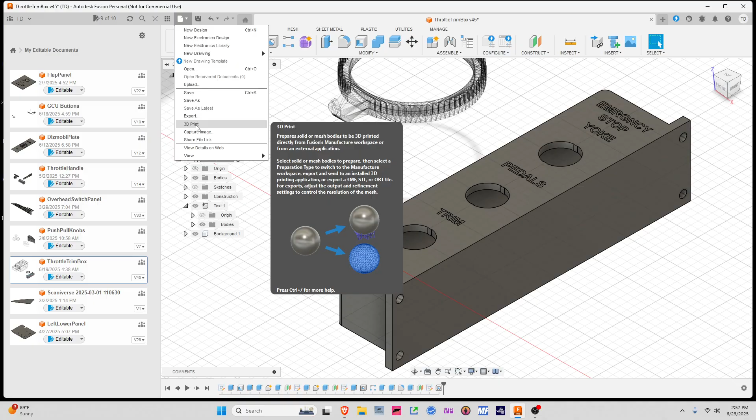The way you've made this text is through a sketch and then extruding these things, so it creates a bunch of bodies or multiple components. In the end it's the same thing or the same problem. So you've got this thing. Pay attention to trim right here. I'm going to do this all here so you can see the whole flow and see if it applies to the problem you're having. So we're going to 3D print this.

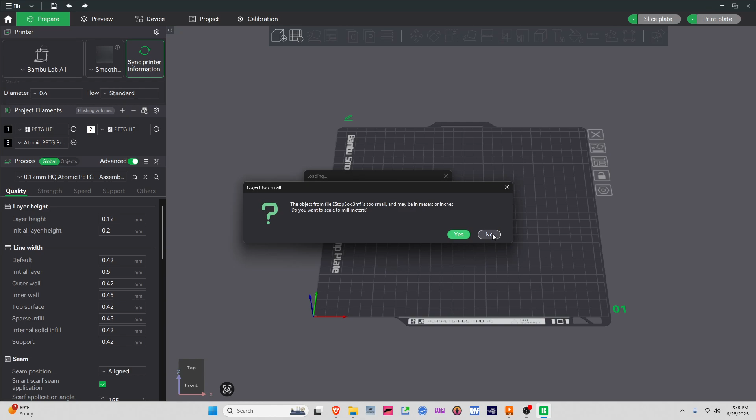Save it here. C:\SimStuff\Parts Building. Okay, we've done that. C:\SimStuff\Parts Building. It is this one. Every time you open it from scratch, it's going to say this. You say no. It's going to say this. And if you want all the parts to stay in the right place, say yes.

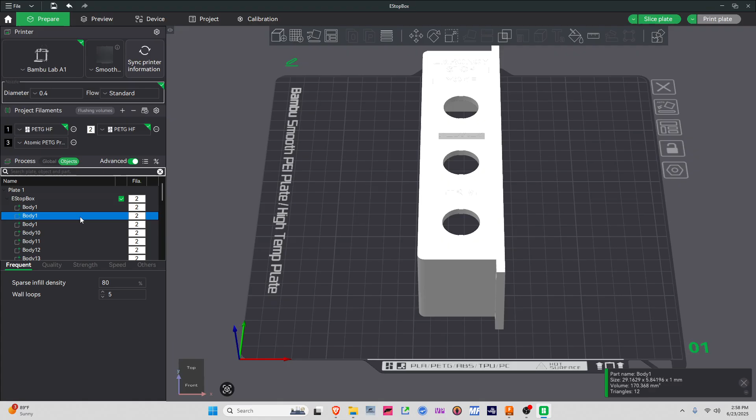Okay, now it's all black. I'm going to print this face down, but that's not necessary or relevant to this. So now we go into objects. The fastest way to do this is to select all of them, make them white, and then find the actual body, that's it, the frame, the case that I want to be black, and make it black.

Okay, so as you can see, all the letters are here. The word trim is intact, although it does this weird display thing. Now I'm going to slice it.

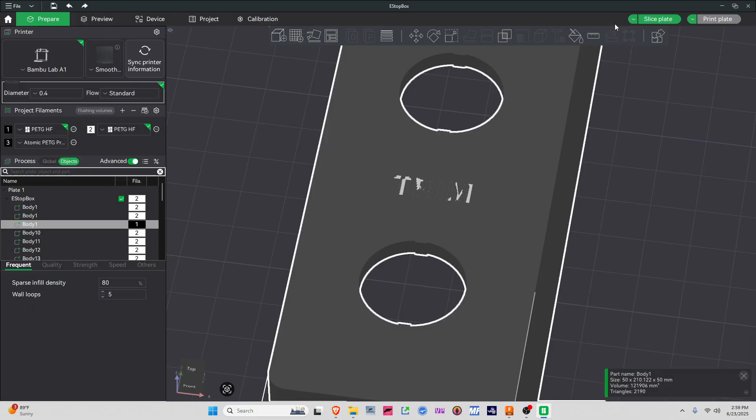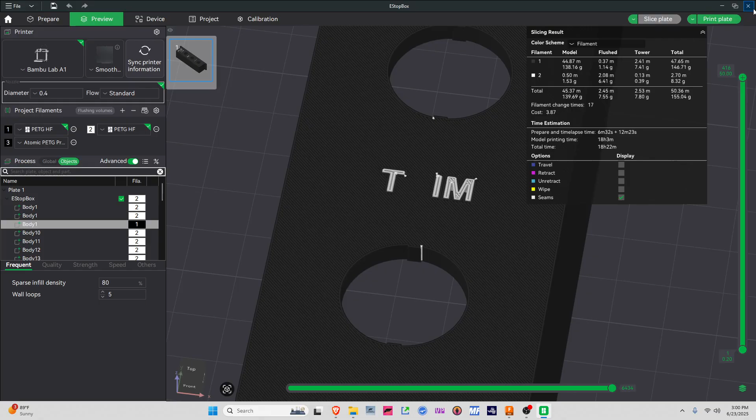And the R has disappeared. Now I can tell you there's a lot of internet responses that say all kinds of things, like this letter is too large, there's not enough space, the nozzle's too large. Try 0.2. As you can see, I'm doing this with a 0.4. I've tried 0.2, I've tried separating this text all the way across so there's huge gaps in between them, and still that R is never there after I slice it. I've tried this in Bambu Studio and in Orca Slicer with 100 different setups.

So now, just to make sure we're on the same page, I'm going to do this again and change nothing. So this is the flow again. Same place, C:\SimStuff\Parts Building.

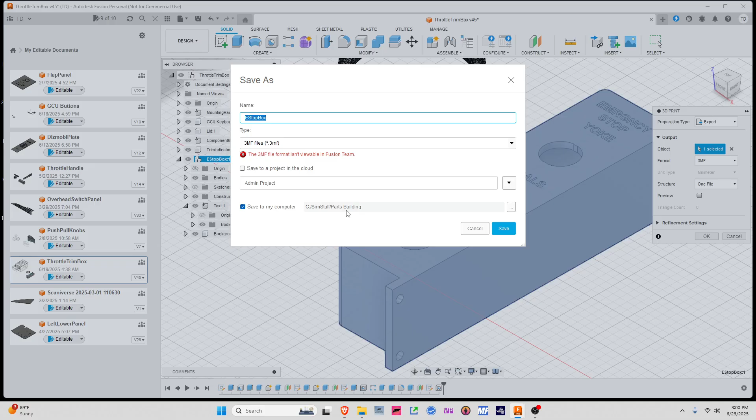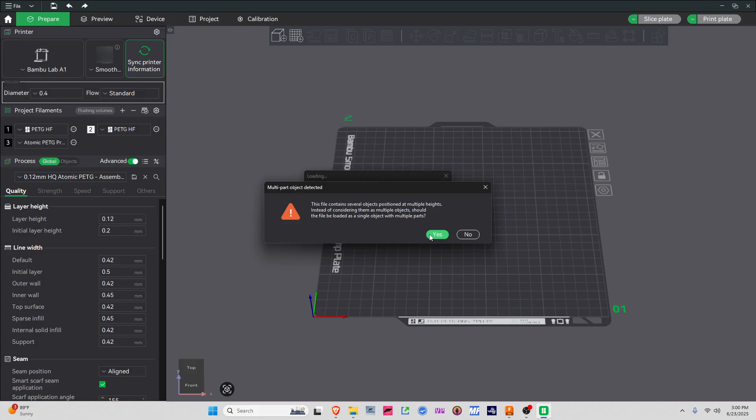I'm going to replace it. We'll go over here, we have a new updated time. So this is our new one. Again, we have to go through this because it's the first time we're opening it in Bambu Studio or in the slicer. We're going to do this bit again, make everything white, and then find the actual body or the frame and make that black.

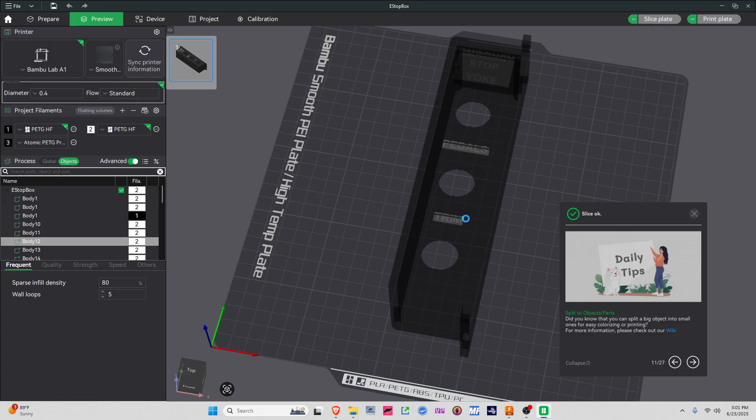Again, we're where we saw we were, the word trim is there, slice it, and again the R is completely missing.

So here is how you fix it. This created multiple bodies. The R is actually the top one, and that's the one that's getting skipped.

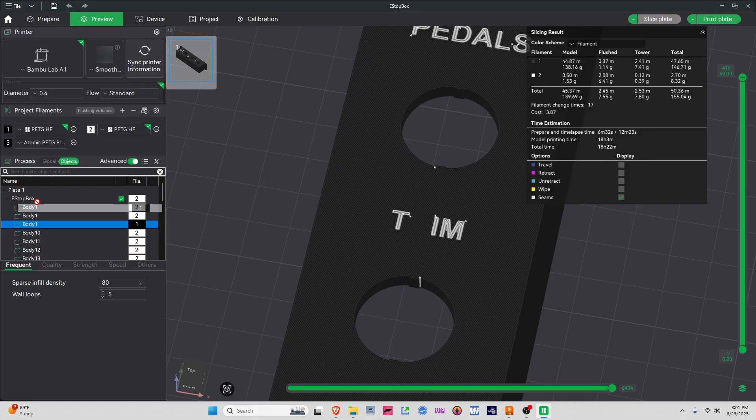If you take this one and drag it to the top and slice it again, magically, hopefully, the R will appear. So be aware, one, that you can drag things here, and two, if you have multiples like this, it's going to have some kind of default sort order. And I've got to think there's a bug that makes this object not print if it's in the first position for some reason.

Either the larger object or the, I don't know what, has to be first. But if you start seeing these characters drop and it's frustrating the heck out of you, try moving some stuff around in here. Drag these around. Mainly, I would say make the body or the large part of your part the top of this.